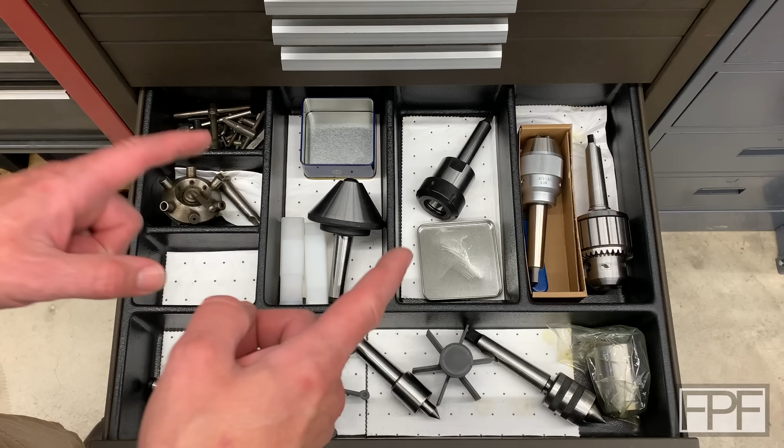So we're over here at the Kennedy tool chest this week, and I want to get this drawer cleaned up. This is actually the last drawer in this chest that has at least lathe and mill tooling in it that I have not tackled yet. The drawer above this one, we did in a previous video.

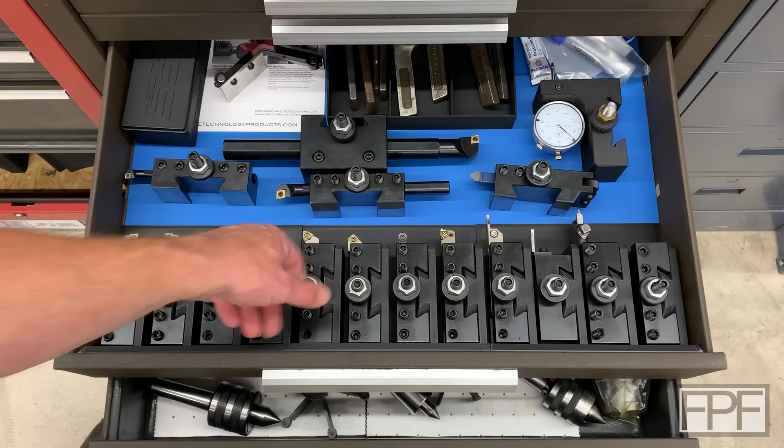This has all of my quick change tooling in it, and I use this all the time. This tool chest is right behind my lathe. The lathe is in that direction, so I can just pivot from the lathe to this tool chest and work very quickly here with my tooling.

The one above this has more tooling in it and some other assorted goodies. And the one above this has even more tooling in it. This has pretty much all of my taper drill bits and some adapters and some other parts and stuff. So if you're seeing a stark difference between how these drawers look and how this one looks, yeah, let's fix that today.

And it looks kind of haphazard in here, but it's actually very much purposeful the way things are placed. Most of what's in here is live centers. There's also an ER40 collet chuck with a Morse taper on it, and then 2 drill chucks. This is all the stuff that I typically use in the tailstock of my lathe.

And the reason it's all spaced out like this is because I'm trying to protect the tapers. These are precision ground, as is the female taper in the tailstock of the lathe. And if these things get dinged up, not only can they damage the taper in the tailstock, but things just don't line up the way you want. It doesn't seat in there and lock the way that it should. So it's really important that the tapers on these stay protected.

So I want to come up with a way to use this drawer that has these in a much more orderly fashion, but still keeps all of the tapers safe.

So what I was originally thinking about doing for organizing this drawer was designing a bunch of flat inserts in here that would replace this, and I guess be kind of a standard size or one of a couple of different sizes that these would basically drop halfway into. So if you imagine down the center line of one of these, it would sit down into sort of an insert that matched that shape.

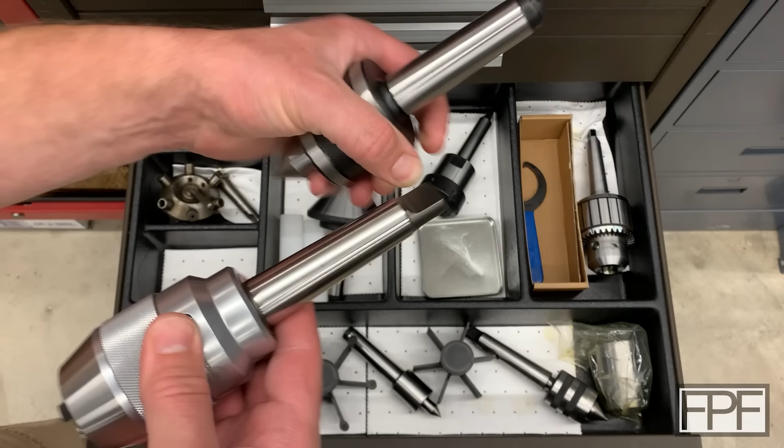So I think if we incorporate into our design the longest of these tapers with a tang and the fattest of the head of the tooling, it should be pretty universal. Again, as I swap tooling out and get new stuff, I should be able to still use the same rack.

I think this guy's going to be an outlier. This is a live center for a pipe. Rather than a point that fits into a center you'd cut into your material, this is designed to fit into a pipe, and then the pipe, or any large diameter thing that's hollow in the center or has been bored, seats up against this face. And this thing is just huge - seeing it in my hand there, you probably get a better idea of scale. So we might not be able to incorporate this guy, but that's okay. If we have one custom insert for this, that's not the end of the world.

All right, let me get everything out of this drawer and get this plastic tray out of here.

With that plastic insert out of here, we can get a better idea of how much vertical space we have to work with, just eyeballing stuff in here. So I grabbed my largest drill chuck with a Morse Taper 3, and if I hold this in here at an angle and keep the tang off the bottom of the drawer, you can see it still clears just fine, and I'm at a pretty healthy angle here - maybe 15 degrees. I'll estimate it with the protractor, but I think that's going to work. So I think that's going to be the first step, figuring out where this taper is going to sit in relation to the bottom of the drawer in our design.

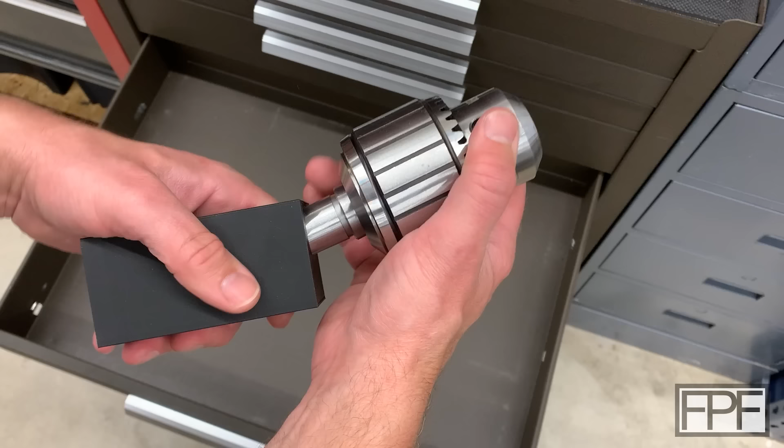Yeah, a little bit of rock in the back. That's fine - honestly, it's probably just a little tight up here at the end. This was our top surface, so that probably closed up a little bit. I printed it standing up like this.

Yeah, tiny bit of rock in the back, so I think I'm happy with that. Let's see how it sits in the drawer. I can't fit my index finger in it, but I can just fit my pinky under it, so that's pretty good. And actually about the same at the top, so I've got one pinky worth of space underneath the chuck and above it. That tells me we are probably at just about the right angle. It's not a guarantee that everything's going to fit.

Let's try this ER collet chuck. Yeah, same thing - this one I don't think is going to fit, but let's just try it. No, I don't know if you can see it rocking there, it's contacting the drawer. And yeah, we have basically no space at the top. It's not hitting, but there's maybe 2 millimeters there. So I don't think we have room to make this one work, but that's okay - that would have just been nice to have. And this is the other one that's kind of big.

Yeah, we're clearing by a mile. So, this is going to be oriented like this. Imagine these all lined up. It's got to be wider than this. I need to have room to come in here and grab these.

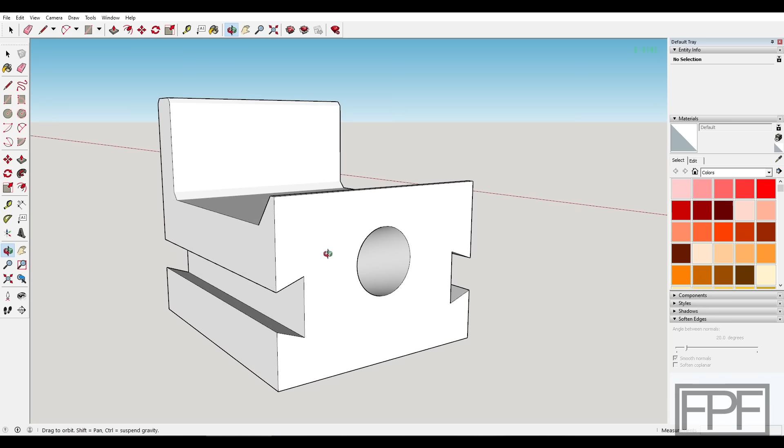Here's the design I came up with. I imagine the first thing your eyes are drawn to is these dovetails on the side, and yep, that is how we're gonna join these together. We'll need 6 or 7 of these. I've got this dovetail piece that I'm hoping can essentially just slide down between two of these to join them together, and then just gang them all together until we have as many as we need for the drawer.

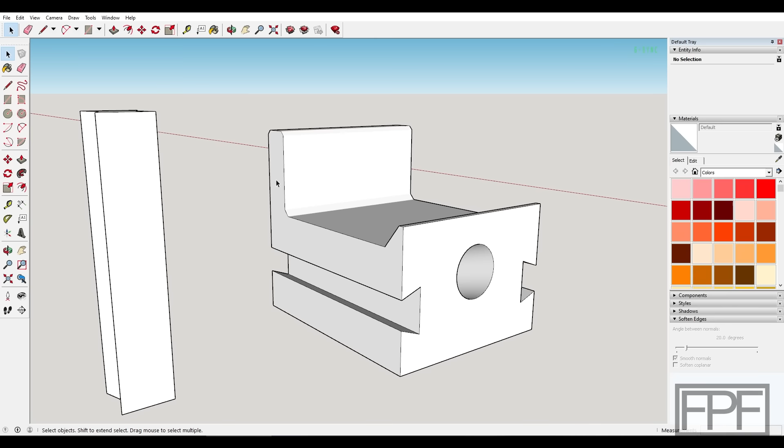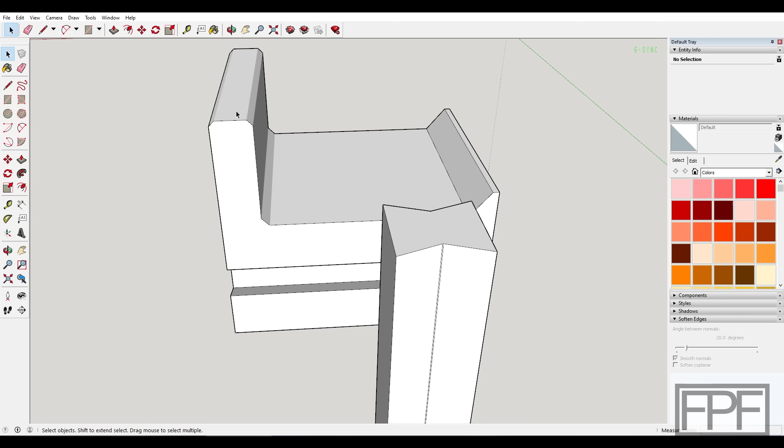The other thing I did, which was always part of the plan, is this tall part up here at the top is designed to lock into the front of the drawer. There's going to be a fair amount of force pulling these forward when I close the drawer, even if I don't slam it, so this will serve a couple purposes: keeping these from sliding forward, and keeping them all nicely aligned.

I took some measurements of the sheet metal from the front of the drawer and tried to design this so it should tuck right in underneath there. I think we'll be able to just rotate it into place. The front lip,

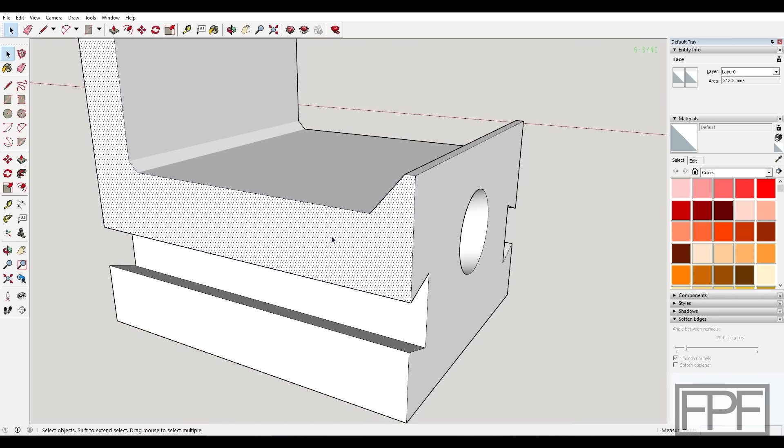I kind of added after the fact. Actually, I had this whole thing at a taller height, basically at the height of this face up here. I dropped it down—we're still nowhere near that taper, we've got plenty of space there.

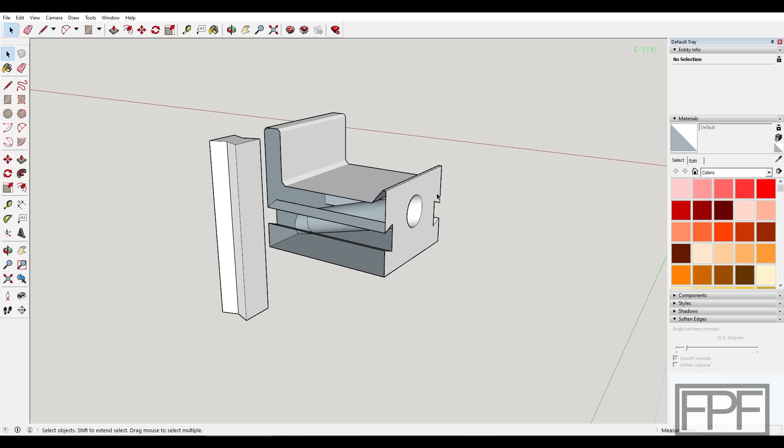If I knock these side faces off so you can see what's going on—I brought this down thinking we might be able to use this for storage. As these are all connected together, we'll have all that space across the front of the drawer that we can't really use for anything else, because we need these 3D printed pieces up there to hold the taper tooling, but otherwise it just felt like it was going to be wasted space.

So I thought if I drop that down a little, maybe we'd be able to use this for like the chuck key for the keyed chuck, or even the key for the keyless chuck—which I know sounds weird that a keyless chuck would have a key, but it does.

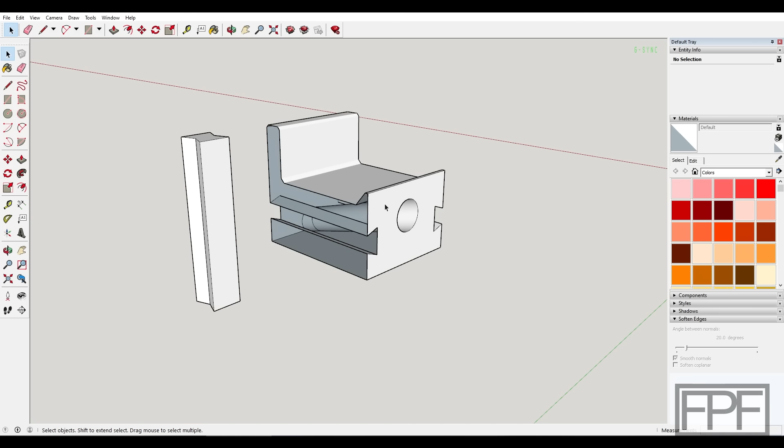So I think I'm going to print 2 of these out. That way we can test how everything fits in the drawer, test how the taper fits, and test the distance between two of these to see if that looks like the right spacing for the tooling. I'm going to print 2 of these out and bring you guys back.

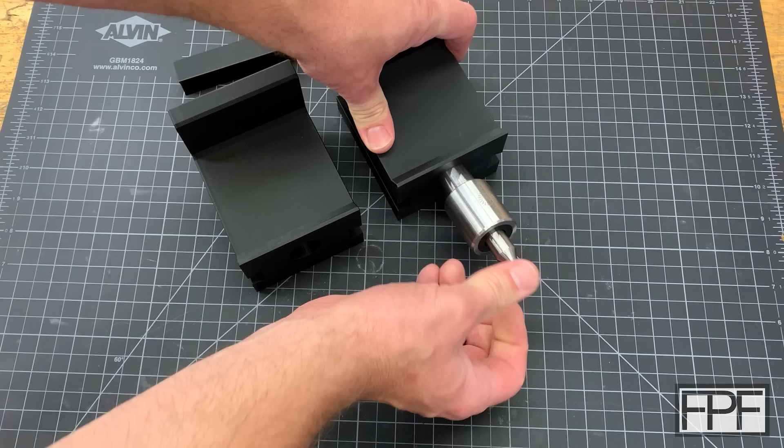All right, our two test prints have completed, as well as our dovetail key. Let's make sure this guy still fits in here. Yeah, that fits really good—actually, maybe too good. Oops, I guess I did ram it in there pretty good. Yeah, it's kind of locking in our 3D printed taper.

Might need to rethink how we have the tapers in these, because I don't actually want it to lock in there, I just want it to hold it securely. Yeah, that's getting stuck. I mean, I can get it to pop out, but I don't want it to be that hard to remove these.

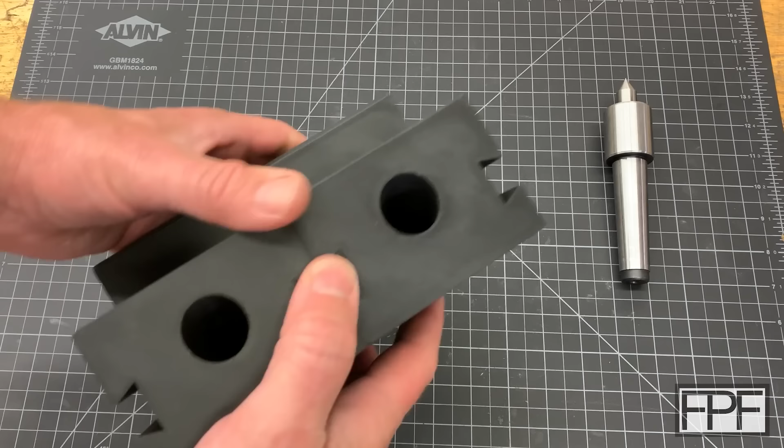All right, let's see how our key works. All right, key fits in really good. I have a small bit of movement if I really pull at it, but I'm not going to tweak that any further—I'm happy with that fit.

And it's not like it could slide around in the drawer, because this part back here is hopefully going to lock into the top of the drawer. Let's go try that. Almost can't even see that key from the back because it's all one texture—it just kind of disappears in there.

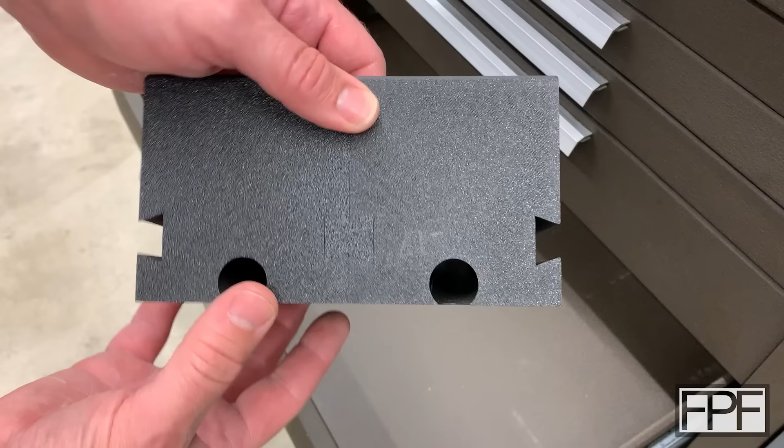Okay, we're hitting back here at the back. Hadn't really considered that, and it's not like we could slip it in from the ends. I think what we could probably do, though, is just add some relief to the back, because once this drops into place... I'm just trying to imagine in my head how this is going to sit. Once this drops into place, we only need to keep it from sliding forward. And if we take a chunk of material out of the back so that this can rotate into place, I think we'll still be okay.

Everything else, I think I'm happy with. Let's see where we end up here lengthwise. Oh, we've actually got a good bit of space there. We could probably shorten this up. I think this is the longest one, this taper and tang. Let me just check some of the other ones quick.

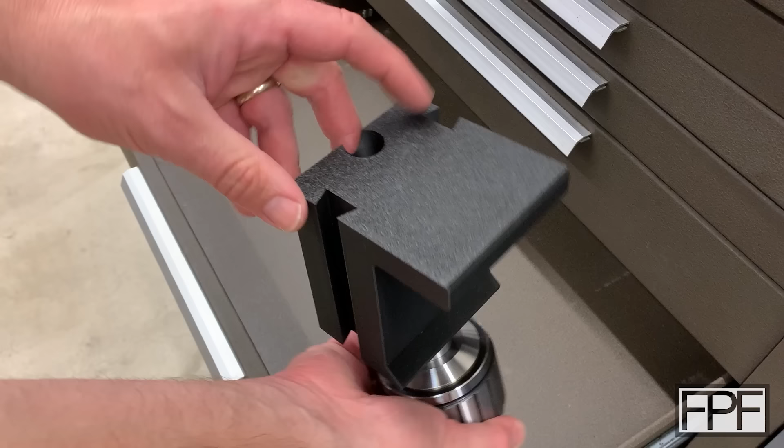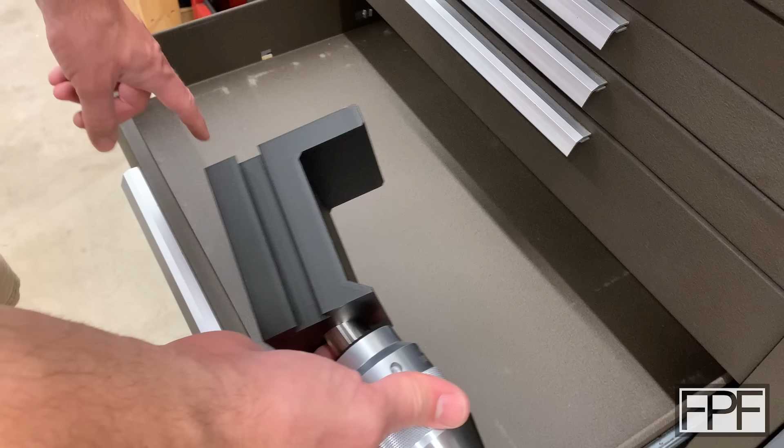Yeah, of all the ones with a tang, this one is the longest. Just using my finger as a gauge, so I think we could actually shorten this up. All right, I like the overall design. I don't know for sure yet how it's going to do locking into the top here, but I'm going to shorten this by probably half the distance that I have in this one.

And we'll put a relief here at the back, so that this guy can rotate into place. We probably need, I don't know, maybe 10 millimeters off the back there. All right, I'll bring you guys back.

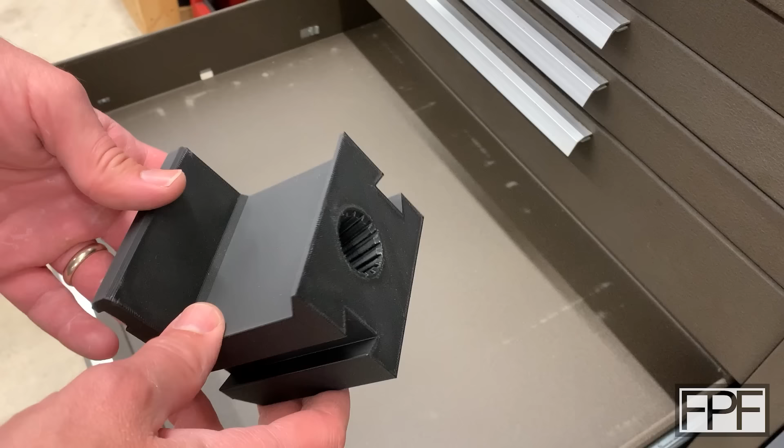All right, our updated design is done, and I made a number of changes to this. I did shorten the whole thing up, and we were seating a bit tight in this taper. I tried putting slots all the way down the full length of the taper and a bevel up here on the front. I'm hoping that it doesn't seat as tightly in there. Let's try that first.

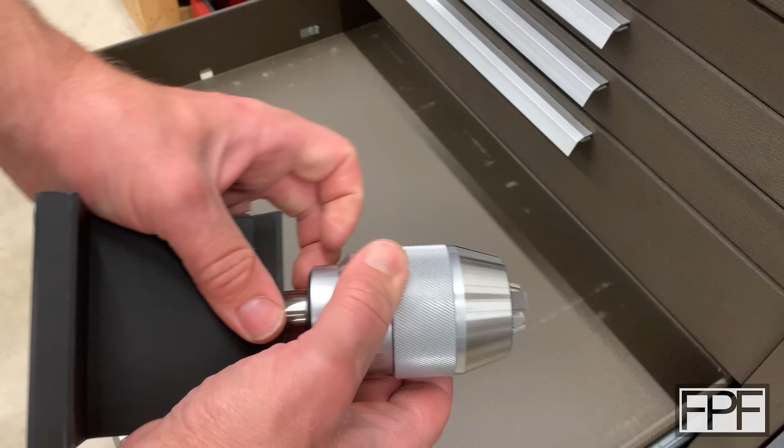No, if anything, it's worse. I'm probably still going to keep that though. I might have just put it in there really hard. Yeah, it's probably about the same actually. I don't think it's any different. It's not better, but I don't think it's worse either.

The other thing I was thinking about was, since this is such a deep, smooth taper, it's going to be hard to see in there, particularly with this down in the drawer. So if we ever do collect any chips or anything in there, I want a place for them to go. I don't want them trapped between the inside of our plastic taper and the shaft of our taper tooling. So if it's a small chip, something easy to miss when putting it away, these slits or slots that run the full length of that taper are going to give that junk some place to go.

So we'll keep that. It only really solved the one issue I was thinking of, but that's okay. The other thing I did was add the relief here in the back to hopefully allow it to rotate into the drawer. Let's try it. Well, solved one problem, created a new one. It's now loose. Looks like we probably just need to add some material to the bottom, and maybe even make this a little bit wider.

The other thing I remembered was that in these drawers there are machine screws that come through from this side to hold these handles in place. Let me get you down, I'll show you what I mean. All right, got you guys inside the drawer now, and you can see those two screw heads in here that hold that aluminum handle onto the front.

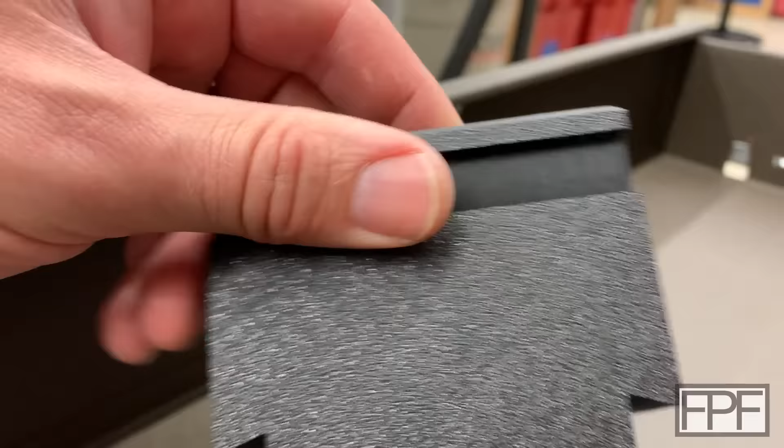And that bit me in the past when I did the other drawers with high sections in the front, and I had to go modify the design after the fact. I actually did remember it on this one. Not in the first version, but when I made the changes to this version, I remembered they were in there. So this should slide past those screws. Yeah, we're good with that. So happy with that. All right, I'm going to go add some more material to the bottom of this so it sits up in here like it's supposed to, and I'll bring you guys back.

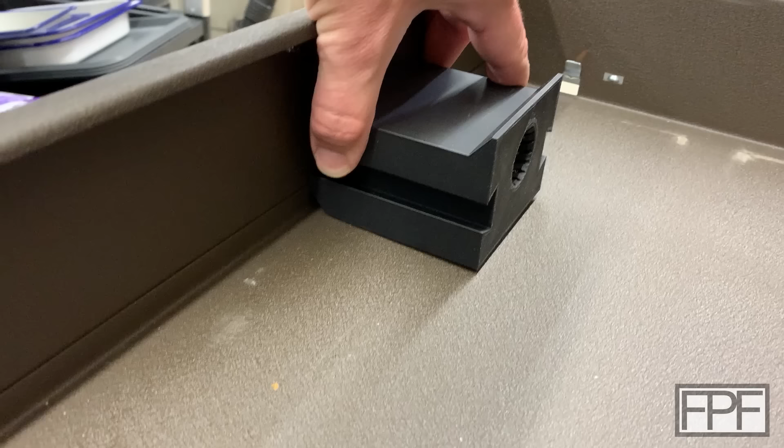All right, I'll save you guys some of the drama. It actually took me 2 more tries to get this correct. So this first one that I did, actually no, it's the second one. Yeah, this is the first one I did. Was close, but what I didn't notice was this piece of sheet metal here at the bottom of the drawer. I don't even know if you guys can see that on camera. It looks really dark on the screen, but basically the sheet metal that makes up the bottom of the drawer has a bend in it and comes up partway to the front piece.

The back here was hitting against it. The relief we put in to allow this guy to rotate in place was really close to clearing that, but not quite. So this version is exactly the same thing, but our relief in the back comes up just a little bit higher. Still clear of the dovetail, but comes up just high enough to avoid that extra piece of metal at the back, and it sits flat down in the drawer.

This one, I don't know if you guys can see, it's not actually sitting flat in the drawer. There's a gap in the front because it can't rotate all the way down. The back is hitting against that piece of metal. So I think we've got it with this one.

Let's try a piece of tooling in here. Oh, the other thing I did on both these, if you compare it to this one, I angled our storage shelf here back a little bit. I noticed in toying with this one after I turned the camera off that when slamming the drawer, things were still sometimes kind of hopping up here.

What I'm thinking about with this space here is using it for stuff like this - the key for the chuck, the key for the other chuck. That stuff I figured I can kind of set in this front rail we're going to have along the front. But I noticed that when I was slamming the drawer shut, stuff was kind of hopping out. So in these two, I set that angle back, and I think that might do it.

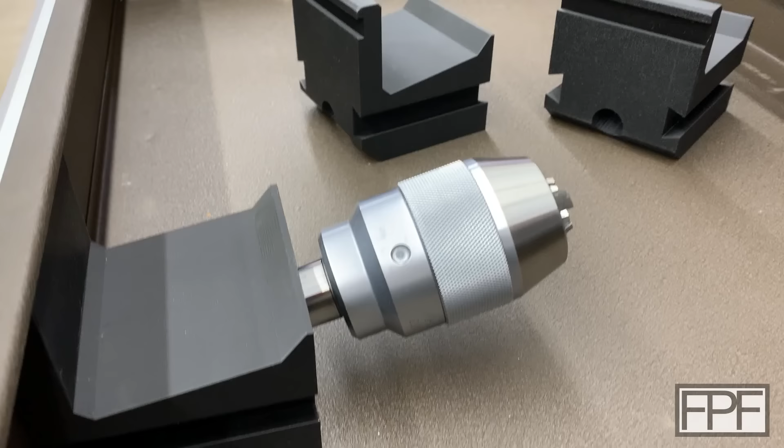Yeah, there you guys can get a better idea now of what that's going to look like. Let me pick you up. All right, hopefully with that view you guys can get a better idea of how things are fitting in here and how that keys in.

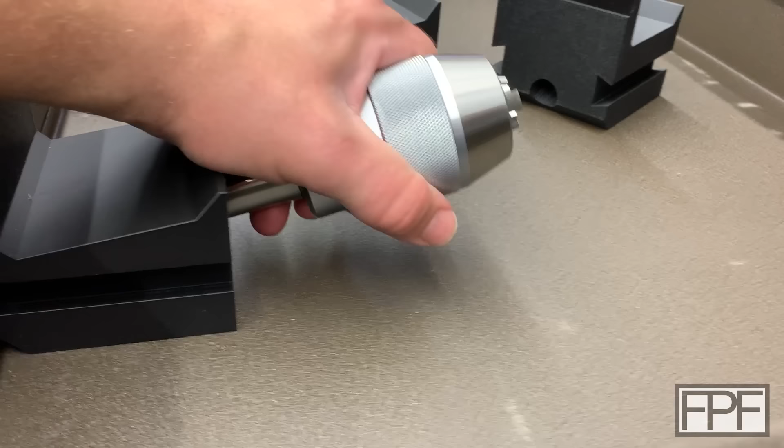You can see that angle drop back here, as well as the angle that this guy seats in place. It's really the front of the drawer - this sheet metal lip up here - that is really holding this in place. If I pull this out, see, that's not going to freestand. All the weight's up here. It just pulls that right over.

But once we're locked in at the front of the drawer, it's basically pivoting. The weight is up here and down here on our front corner. So that should work well. And I think this is at enough of an angle that stuff will stay in sort of this tray that we're going to form across the front, and this guy should be retained.

Let's try slamming this. All right, I slammed that pretty hard, and it did unseat, but it didn't come out. So I think we'll be good. I don't envision slamming it like that.

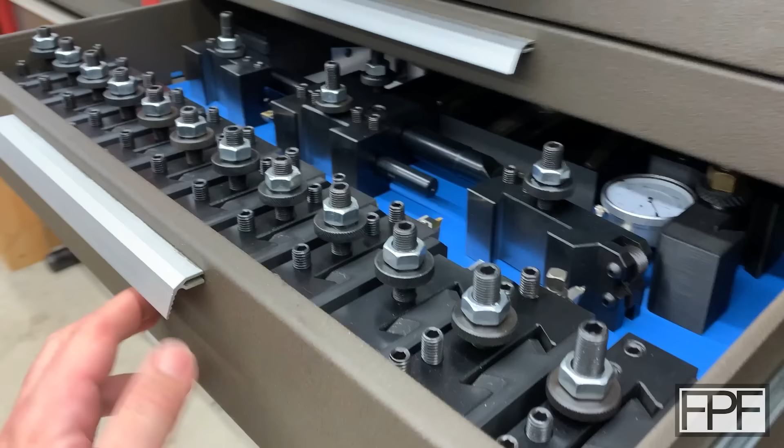The more weight that's in these drawers, the better it is. Like this one above it that has all my quick change tooling, I can just give it a push, and the weight in the drawer perfectly closes it without slamming it. I don't think this one is going to be quite as heavy, at least not to start off with, but it should be heavy enough that it closes nicely.

So, all right, I need to print, let's see, 6 of these. Let me get those going, and I'll bring you guys back.

All right, all these prints came out really nice. As tempting as it is to assemble all these on the bench, I don't know that we'll be able to get it in place. I think at least where those screws are going to prohibit us from rotating these down into place. I think we need to rotate these in and then slide them to where those screws are. So let's go over to the drawer and start putting these in place one at a time, and then push our dovetails in.

All right, that is already looking pretty nice. Let's get the dovetails in.

Oh, that one went right in. Three of these other ones, I had to use the quick grip clamp to get them in there, for better or for worse. I mean, they're definitely not going anywhere.

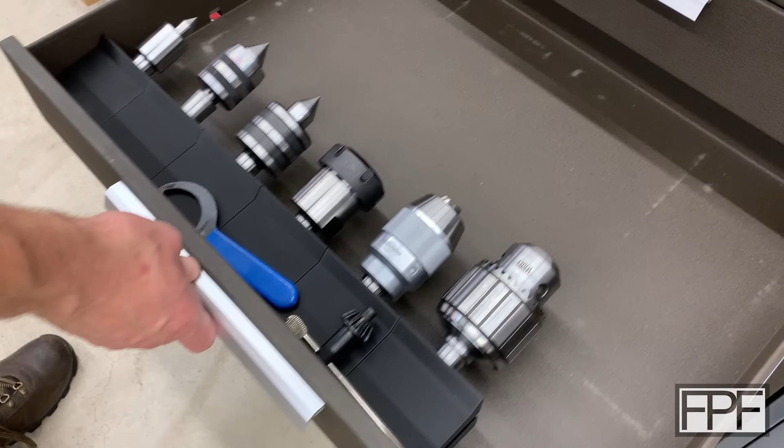All right, I think that's working out really well. I was a little bit concerned about getting these unseated from these tapers, but messing with it here for a few minutes, I realized it's all about technique. If I come down like this and try to get it out, I actually almost need two hands - they can get stuck in there pretty good. But if I bring my hand in like this, and get my index finger and thumb, I can use my hand like a wedge, and they just pop right out.

So it's all about technique. I'm glad I didn't get too stuck on trying to get these tapers to somehow be tight enough without actually seating, because I just need to rotate my arm around this way and squeeze them out. This one sticks out so far - that's probably the hardest one to get out. The other ones pop out pretty easy with that wedge approach with my thumb and index finger.

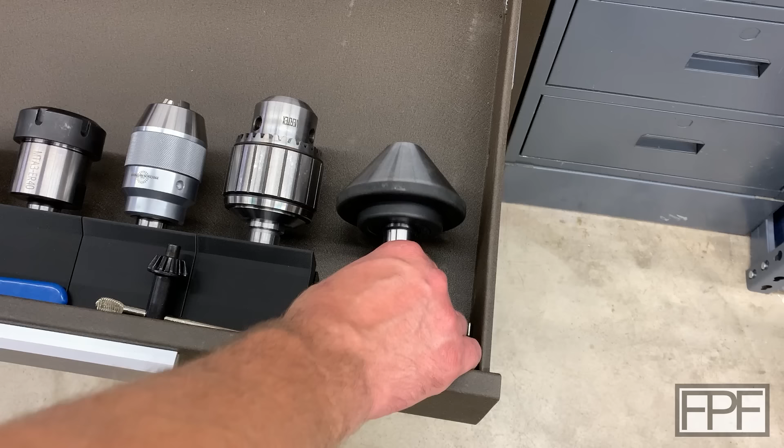And we've got room down here in the end for this pipe center. It's just a matter of figuring out how we design for that. I think I want it to sit flat like this, similar to the original design I talked about. Actually, if this guy is standing up like that, is it? No, it doesn't even clear standing up, so it's going to have to be at an angle like that. So that could actually be fairly tricky to design.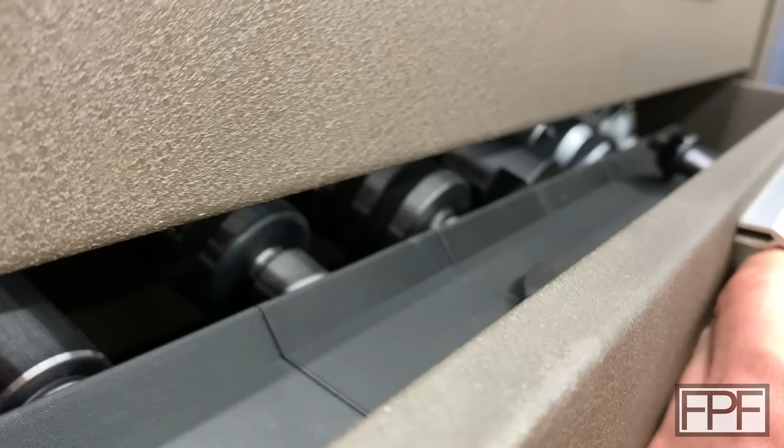Guys, as always, thanks for hanging out in the shop with me for this design and build. I don't find myself saying this often, but I'm actually really glad that I procrastinated doing this drawer, because this is not at all the original design I was going to go with. The original design was going to have each one of these sitting flat, each being a custom little compartment. I don't know if that would have looked cooler or been more usable than what we came up with, but yeah, this is great and they're all interchangeable. I could swap out all 6 of these with similar pieces and they'd all still fit just fine without doing any more design and printing work.